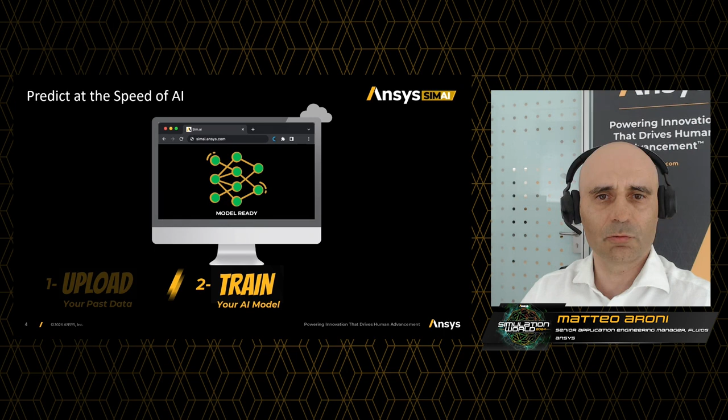SimAI is a generative AI cloud-based platform that takes any set of simulation results as inputs to train the AI model. Once the AI model is ready, and it can take up to 2 days for very large models and datasets, it can generate new simulation results on any unseen new geometry fed to the platform within seconds.

How could such a powerful tool fit your company processes? We can imagine that any simulation and test results, whether coming from laboratory or from in-operation testing, could be uploaded to the platform to train an AI model. Anything in the range from dozens to thousands of data samples would be good for SimAI model training. Once the training is done, the resulting AI model can be labeled as an item in a catalog of AI models with any logic you may value.

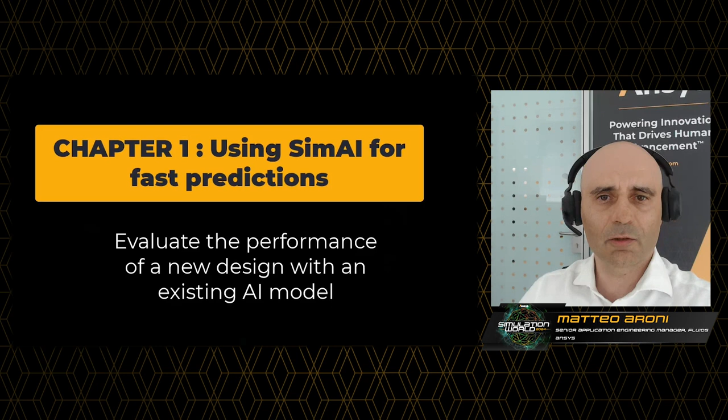Now, when it comes to evaluating performance on new designs, the appropriate AI model can be selected from the catalog and consumed by simulation and testing illiterates beyond the traditional users. There are multiple ways to expose SimAI technology inside your company processes. One way is through the cloud-based user interface. Select the AI model you want to use. Upload your new design in the shape of a very loosely defined surface representation or triangulation. No need for it to be closed or to be representing a volume.

Run the prediction. It comes with a confidence score, which is either a measure of the quality of the prediction or a measure of the training data representativeness of the new geometry. Once you have your prediction, you can grab the files and post-process them directly in the platform.

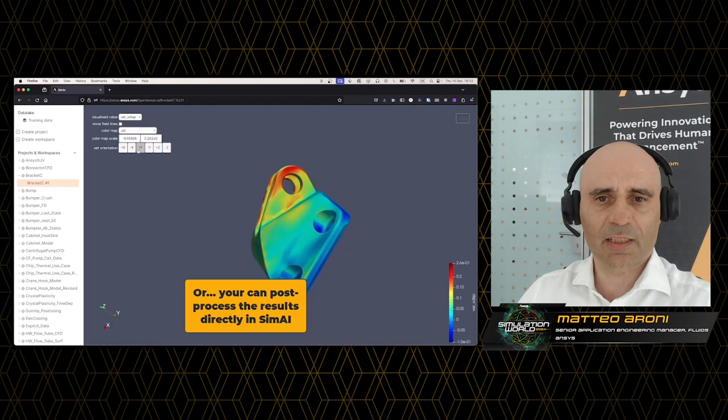By the way, let's take a step back. How did we create the AI model in the first place? As said before, a project here is a specific AI model. To the project, by drag and drop of individual data or entire folders, we add all the desired training content, we configure the inputs and the outputs in terms of variables of interest, and finally, we select the 3D space we want the prediction to address. Also, the training duration is intuitively controlled by a slider.

One of the unique capabilities of the SimAI approach is that both the training and the prediction are based on continuous functions dealing with the volumetric data. This enables a better understanding of the data and significant flexibility for any downstream post-processing. The surface data visualization is just one of the possible options, and the method also ensures that different surface representations of the new geometry lead to consistent results, unbiased by mesh distribution.

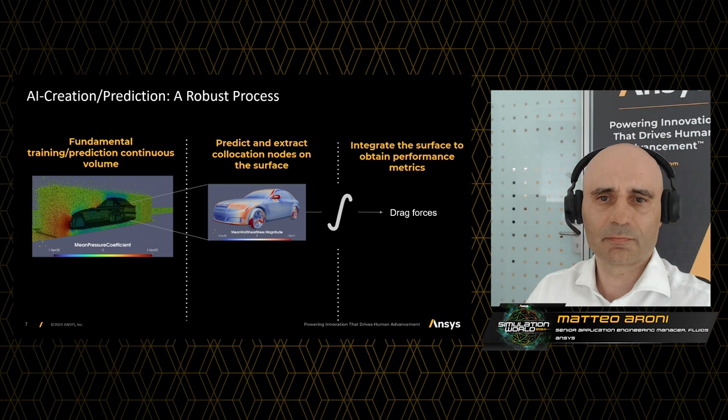Any global quantity measuring performance is obtained by integration of the relevant source data, with increased robustness and consistency in any optimization study. Even on a model that we could consider very small by automotive aerodynamic standards, when we consider both the meshing and the solving time, SimAI prediction is close to 20 times faster than CFD calculation.

We want our AI model to be precise in the sense that there is enough variability in the training data so that the prediction is not perfectly accurate, which could be resulting from overfitting, but is instead lying within a small acceptable tolerance, because this precision measures the confidence that the next unseen geometry prediction will also be lying within the same tolerance from the simulation.

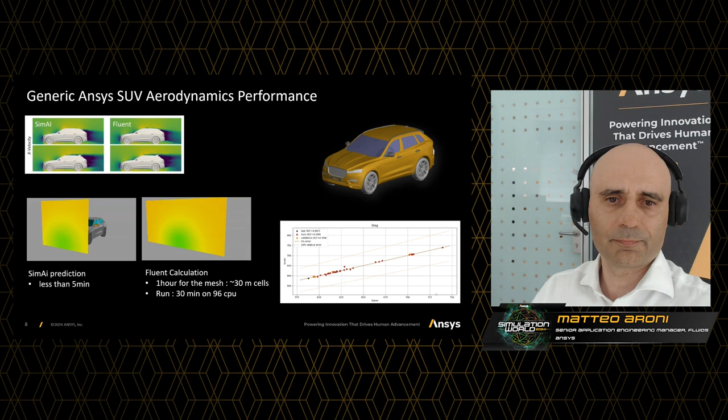Now, how can we capitalize on AI acceleration for this specific application? We can certainly imagine complementing previously isolated CFD simulations on selected car configurations or attitudes with a full and continuous sweep of data across the full range of possible car attitudes, very much alike what we are used to do within the wind tunnel once a car model or a prototype is built, overcoming, of course, the lead time required to get from the design to the prototype or actual product manufacturing completion, but also being competitive with experiments in generating a full aero map.

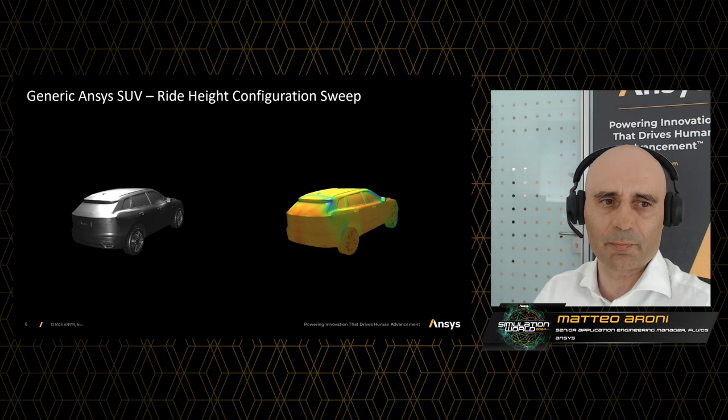Again, even if these slides give a sense of how accurate the prediction can get with a training dataset that is homogeneous enough and with an unseen geometry well inside the design space described by the training data, the precision, or in other words, the maximum distance between the data and the prediction for the whole training and testing data population, is the most valuable metric to chase, because this helps ensure the confidence on any prediction on a new unseen geometry that is also similarly lying within the design space.

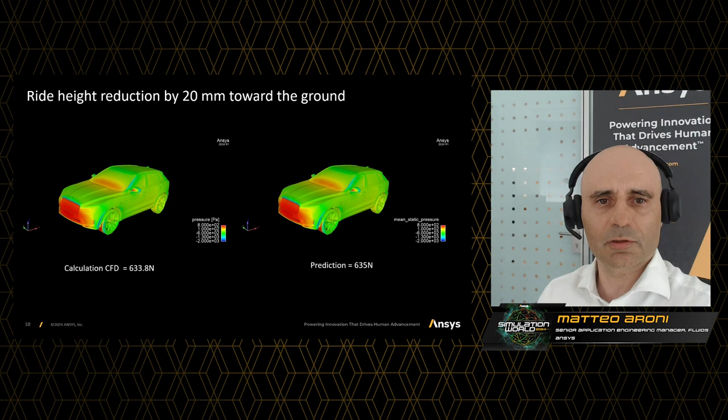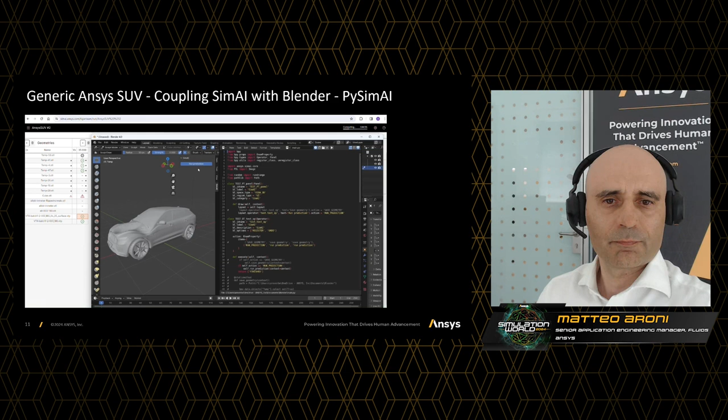Another way to capitalize on both AI acceleration as well as on SimAI specific flexibility is exposing it very early in the design cycle. Here we see in the foreground a Blender session from which, by means of PySimAI, the SimAI Python API, we have created a small script that sends the morphed geometry to SimAI and retrieves the predicted field back to make it available to the designer in any form, qualitative or quantitative, that would make sense to guide through the design space exploration.

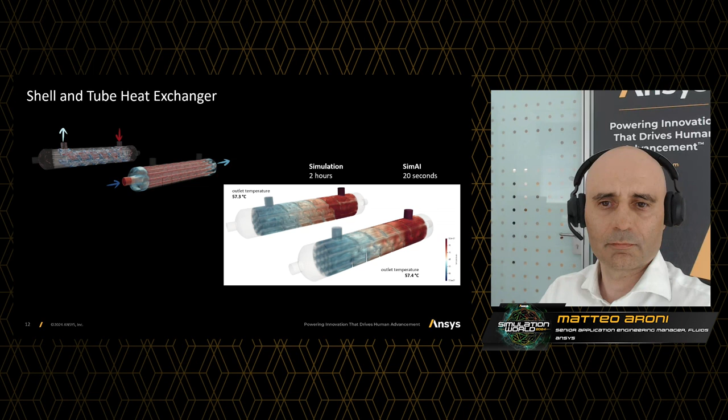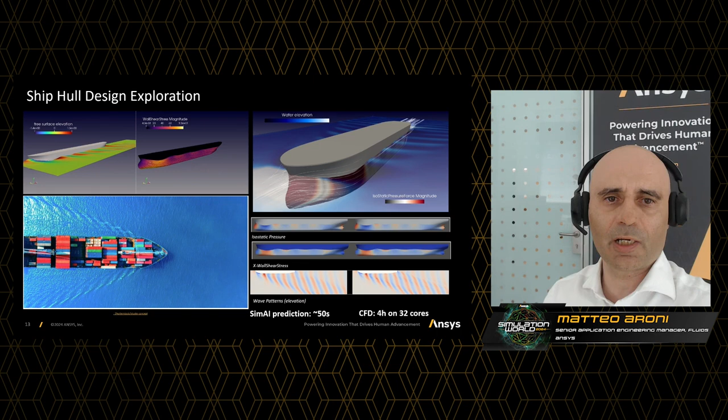The additional complexity of this multi-phase free surface flow around a ship hull is making the CFD simulation longer, and then the speed up factor enabled by SimAI bigger. The size of the training data is less than 300 simulation results that cover the design space of hull shape variations combined with varying operating conditions such as draft and boat speed. With a predicted resistance error compared to CFD of less than 4% and a perfect wave pattern prediction, we can assess the performance of new hull designs in a few minutes instead of days.

Here we see another step up in complexity with a solid phase distribution that is immersed in a liquid filled stirred tank. This solid could be a product, a reactant, or a catalyst, in any case a key component of the device's performance. The free surface location is also called cloud height and is a critical measure of the process performance. This is a type of CFD simulation that runs overnight on a small cluster. With about 30 of these simulations, we can create an AI model of the stirred tank, including a significant topology change, such as the number of impellers.

The AI model prediction runs thousands of times faster than the CFD simulation, and it can provide insight on the solid loading and assess the location of the liquid interface, or cloud height, within a few percent from the CFD result. A repository of all data could be used to build AI models that could predict the cloud height at the change of impeller type and number.

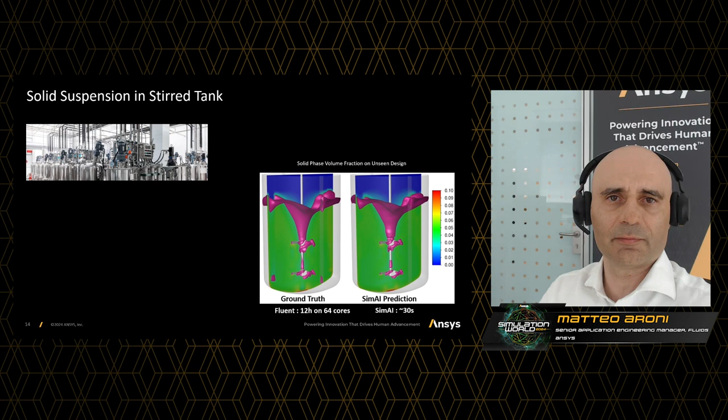Taking a step back in physical complexity but emphasizing more the topology change, this is a battery thermal management problem, very instrumental in battery life prediction, a critical success factor in battery design. With about 10 accurate CFD results, we could create the AI model of the battery module, including its cold plate for cooling. The training data included different configurations of cell packs, liquid coolant capacity, cooling inflow speed, and cooling channel diameters. The AI prediction on 8 new cooling designs takes less than 1 minute, with a maximum error of 2 Kelvin in the battery model and average error of 0.2 Kelvin.

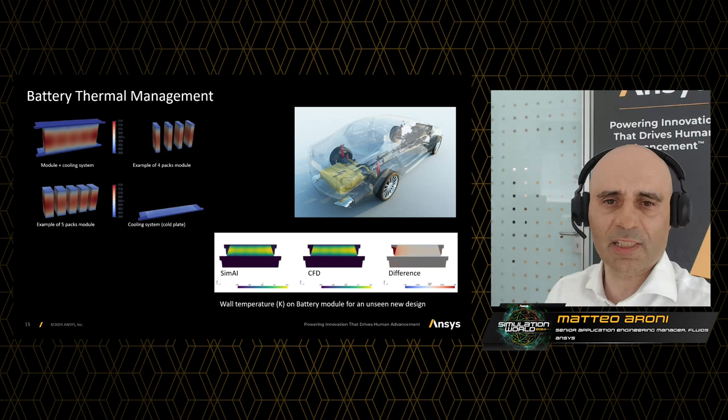This accelerated topology exploration can be used to assess, in the earlier stage of product development, very different configurations, and at the later stages, to fine-tune the selection of the optimal shape of the cold plate design.

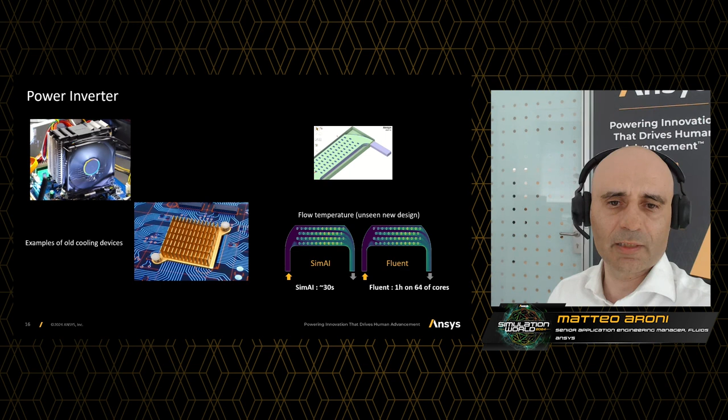Here is another thermal reliability problem of electric components in critical environments. We used about 30 accurate CFD results to create the AI model of a forced convection cooling channel installed on top of a power inverter. The topology changes are larger in the design of the pins, and with an AI model temperature error compared to CFD of less than 2%, and accurate flow field and pressure drop prediction, one can reduce electronic cooling system development time from 2 months typically to less than a week. It is clear that such an acceleration opens up the possibility to virtually test many more operating conditions, even farther away from nominal design, ultimately resulting in increased product reliability.

Now, to conclusion: are we moving the first steps into a new era of AI accelerated simulation? Will the product development cycle be revolutionized by AI? The talk today was not so ambitious as to try to answer these questions. We were just trying to humbly describe ANSYS SimAI, the cloud-based physics agnostic AI platform from ANSYS, touching briefly on some fundamentals and possible ways of using it in a couple of CFD relevant use cases. I hope you enjoyed the content and wish you a productive stay at ANSYS Simulation World.

You could say this is where it all began, with one of the most legendary brands in all of motorsport. When they fire up the engine, I felt something difficult to describe. Sometimes a dream comes true, but a story like mine can happen just with the Ferrari family.

The reliability of the CFD simulation for the Ferrari Challenge is the result of finely optimized technology. The Ferrari Challenge, the most renowned single-make championship series designed for those whose passion for racing runs as deep as iconic red hues. I'm here in Maranello, Italy, at Enzo Ferrari's famous factory, to see firsthand how simulation continues to drive innovation at this house of performance and elegance.

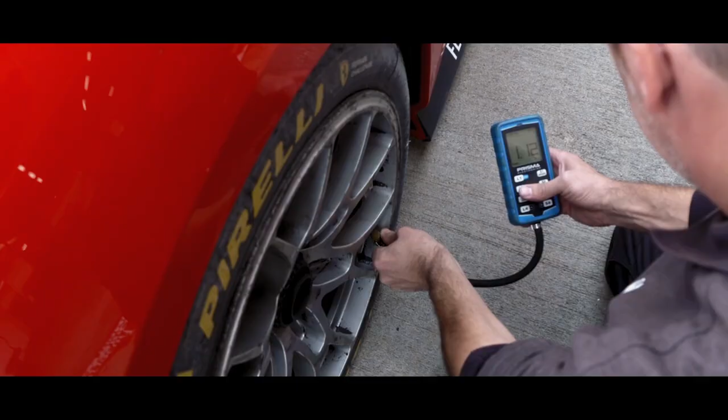If you consider that in the past, the total time you spent to be ready was almost 2.5 years. Now, thanks to simulation, in 1 year we are ready.

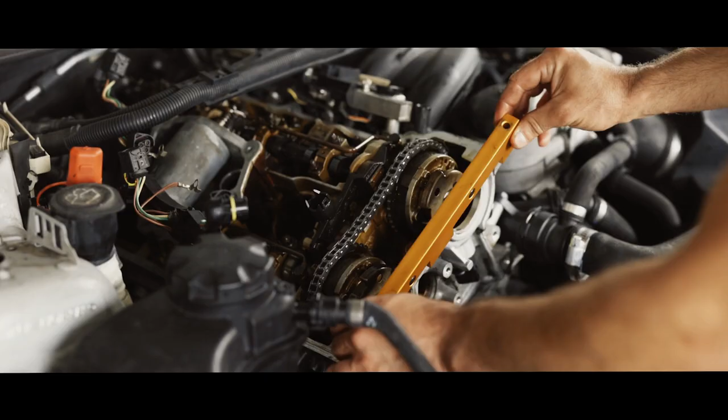For more than a century, mobility has been the beating heart of human progress, connecting us across vast distances, expanding our reach, and shaping our daily lives. But today we stand at a crossroads like never before. With advancements in electrification and sustainable practices, the industry is undergoing a profound transformation, unlocking the future of mobility and driving us towards a world of limitless possibilities.

When talking about future mobility, it's really important to be more sustainable, to be more efficient, to reduce energy consumption of vehicles.

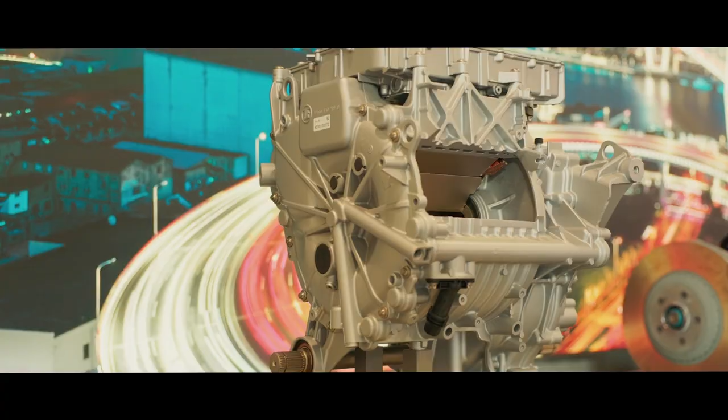We literally have 6 million variants. And how do you validate it? You can't go about testing the 6 million variants on the roads or on our tracks. It's very difficult. We are able to bring this component together into a very complex system, and it is a fully integrated, efficient, summed-up solution. The key enabler for us to do modularity is to have good simulation tools.

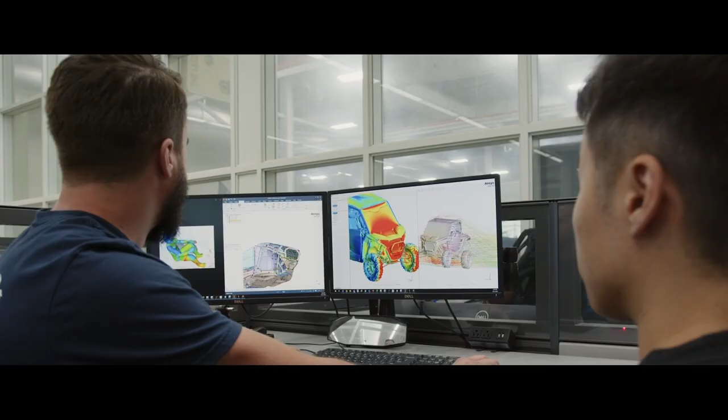From the track to Main Street to the motorway, we've seen how simulation is preparing us for the road ahead and helping us reach the future of mobility faster than we could have ever imagined. But what about the places where there are no roads? Well, prepare to get a little mud on your boots, because today we're miles from the comforts of the design lab to see how simulation is taking us off the beaten path.

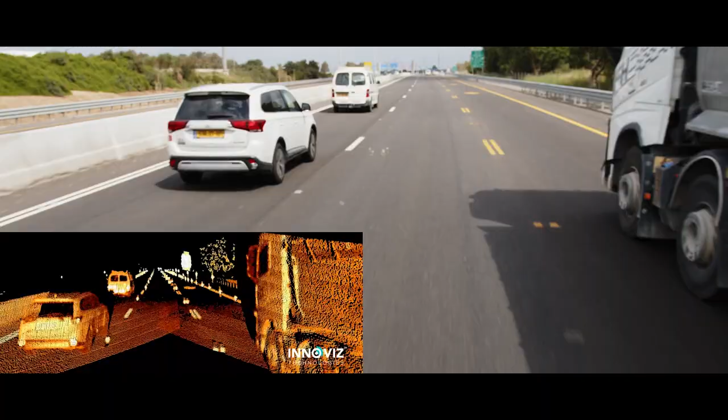No one's driving it. There is no driver here. And more than 90% of accidents are caused by human error. This can be prevented if we really let the car drive itself. And this is where simulation comes in critically.

No one's driving it. There is no driver here. And more than 90% of the accidents are caused by human error. This can be prevented if we really let the car drive itself. And this is where simulation comes in critically.